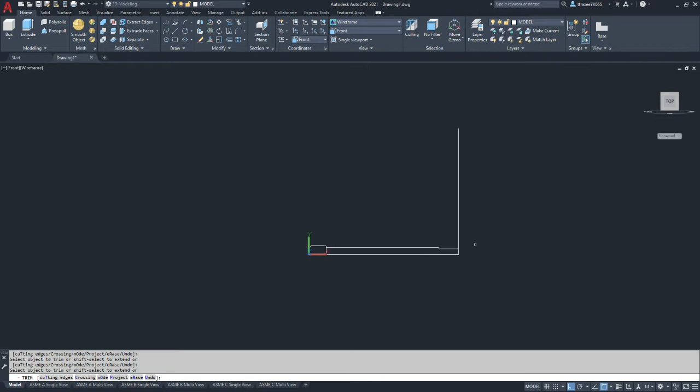Now we can trim off the excess. And we should be left with a shape that looks like that. And actually we need to trim off that little piece. And we can trim off this. Now we need to put our angle on here.

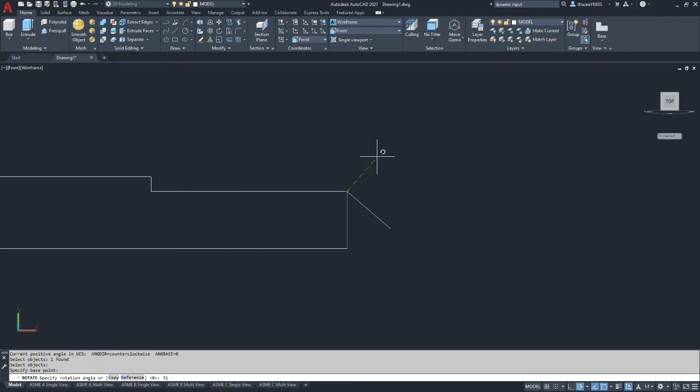Let's select rotate, select the object we're rotating, we're going to hit enter, we're going to select our pivot point, and we need to go the complement of 59 degrees. So that would be 31 degrees. Alright, so now if we draw an arbitrary line out in the end, we can do an extend and extend out our 2 points. And then likewise trim off the piece we don't need and delete the line.

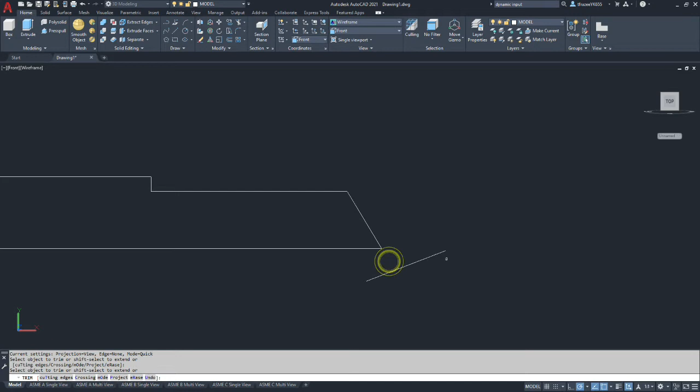Alright, we more or less have the shape we need to revolve, minus a little arc shape here. The drawing says that it's 185 thousandths from this corner. So let's draw a line, and we're going to offset that line 0.185 to the left. So that's one edge of our arc.

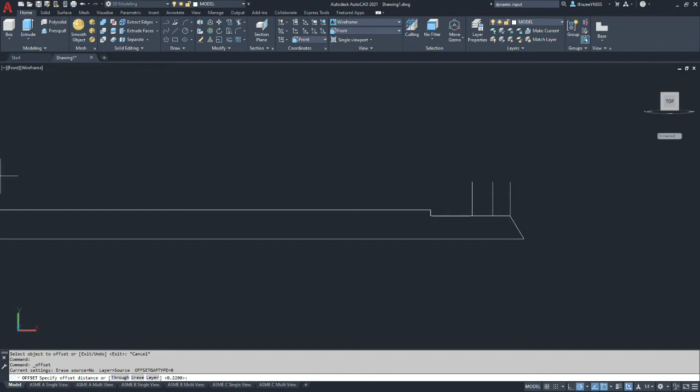And then it's 220 thousandths wide. So we'll repeat our offset and put in 0.22 and offset the line again. So the partial arc, non-tangent arc, fits between those two lines. And the third point of the arc, the bottom of it, is a diameter of 458 thousandths. So we offset half of that distance, which, half of 458 should be 229.

So 0.229, and we offset from center line. Alright, so now if we extend, we trim the length of that line, we have 3 points we can select on. We can pick on the intersection of these lines for the first point, the midpoint of this line for the second point, and this endpoint for the third point of an arc.

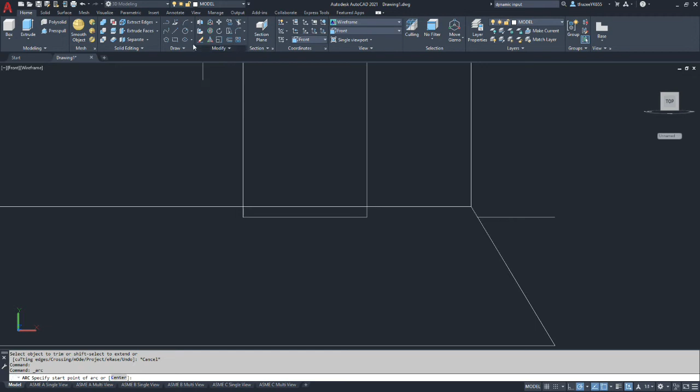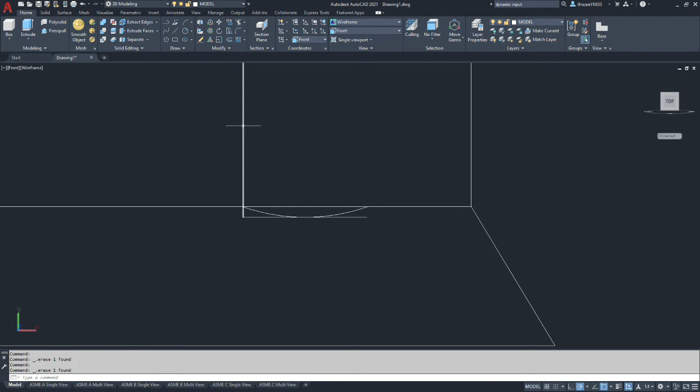So we're going to switch to arcs, and we're going to use 3 points. And make sure your object snaps include intersection and include midpoint. So we're going to go from intersection to midpoint to endpoint, and we get our shallow arc. We then can delete these other construction lines by just highlighting them and pressing the delete key on your keyboard.

And then we come back and trim off the line segment that falls in between. And we also don't need this construction line anymore. I'm not sure why I was having trouble trimming that box out, but alright, so we're at a point where we can revolve this. We need to join this all into one entity.

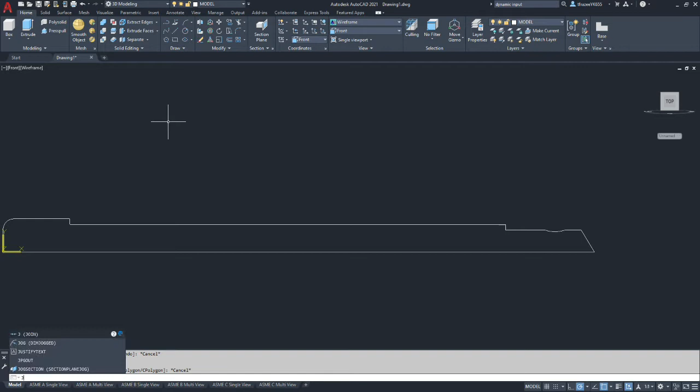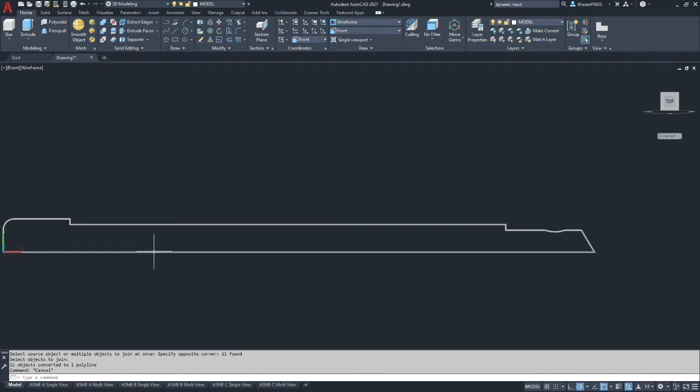Now you can use polyedit or you can use a join command. You may actually be able to use a region command too, but I'm going to use the join command and select everything. And when you go hover over or select it, it should be all one piece. I'm going to go to an isometric view.

We're going to select our solid revolve. So you're going to go to the extrude command, and you're going to pick the second option down, which is revolve. And we're going to revolve the joined body. We're going to hit enter to accept that. And you could use an object. The problem is it's all joined. So I'm going to use some coordinates.

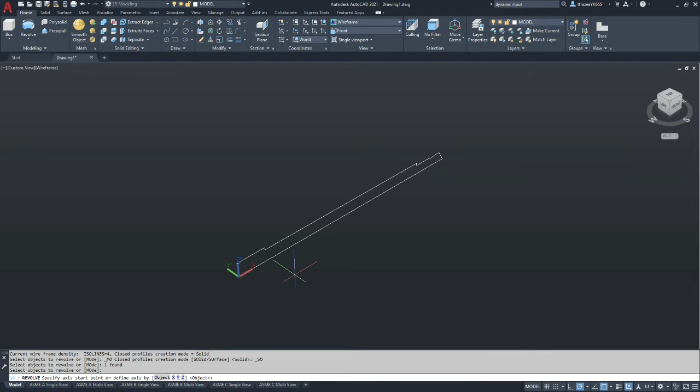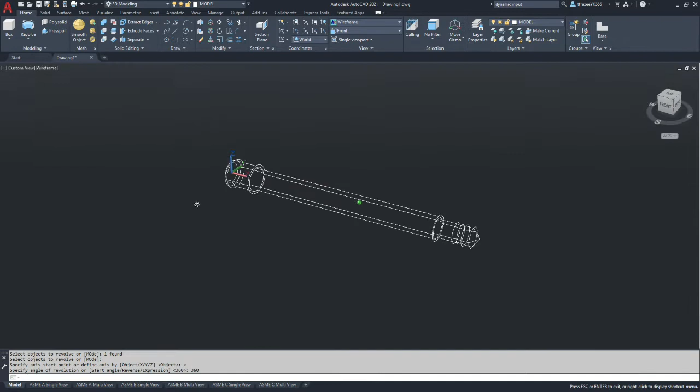X coordinate, and we're going to put 360 degrees in. So that rotated it in the coordinate direction of what I had in X. Now if your gnomon, your trihedron, is pointing a different angle, you would need to pick the one that's going in the correct axis. So we're going to go to the conceptual, and you should have something that looks like this.

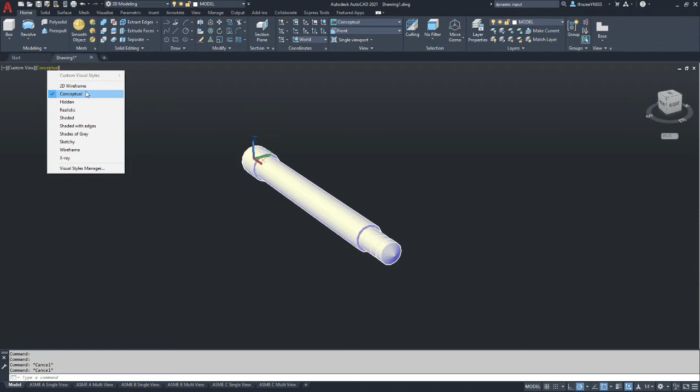Okay, and the first thing we're going to do is set up a couple sketches. So the first one, we're going to set up a sketch that's going to mimic the cross section of the thread we're going to cut, and we're going to use a helical path for that. So we're going to go back to wireframe. This way I can pick this top quadrant of the model and create a line that's horizontal. That horizontal line represents the major diameter of the thread.

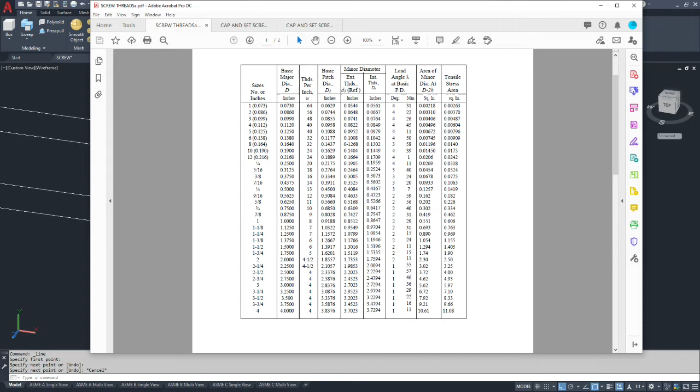If we go to our chart, the minor diameter of the thread for a 5/8-11 on an exterior thread is 0.5168. So if I were to take the major diameter of 0.625 and subtract the 0.5168, I'm left with a difference of 0.1082. If I divide that in half,

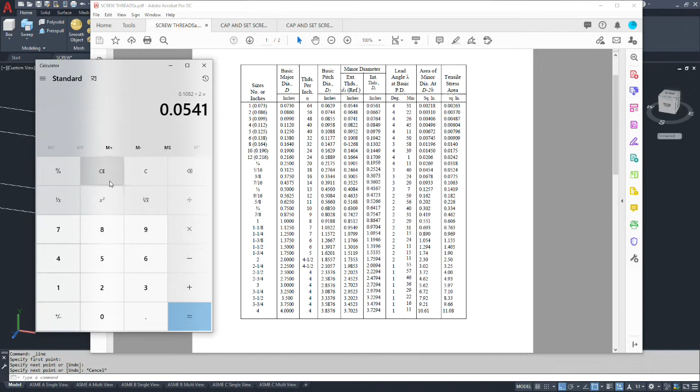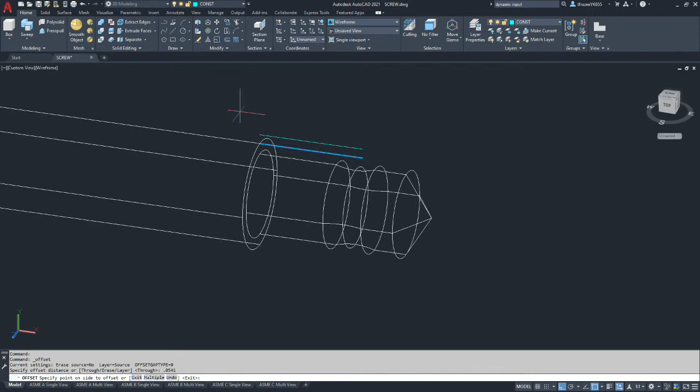that is the difference between the major and minor diameter, 0.0541. I am going to do an offset of that amount from the outside for the radial difference. Offset of 0.0541. Alright, so this is the major diameter, the minor diameter.

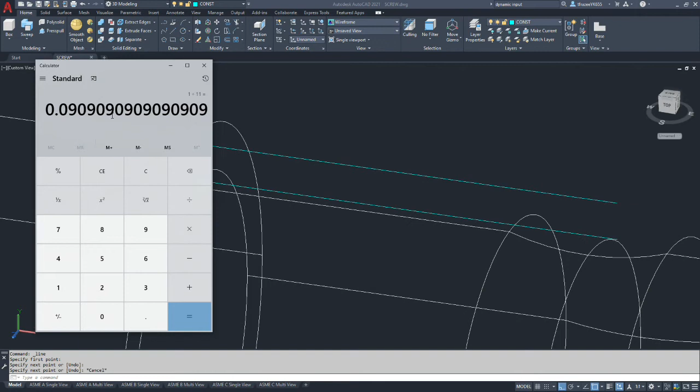I'm then going to draw a line from endpoint to endpoint, and I'm going to offset that by the pitch, which is 1 divided by 11. So it's 0.0909. I'm just going to use 0.09. So I'm going to offset 0.09 this vertical line to the right. So if I were to trim this up, this blue box represents one thread pitch.

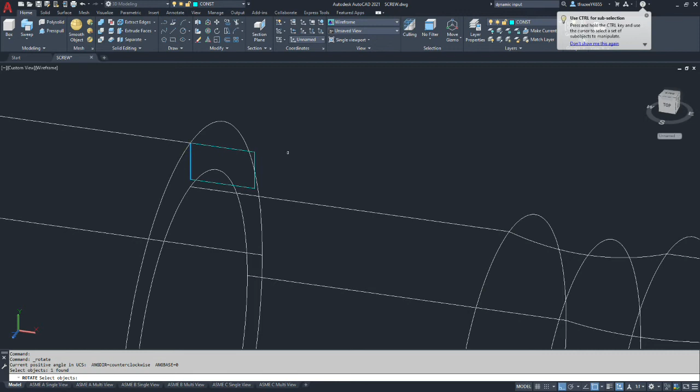Now remember, the thread pitch goes from the theoretical sharp to theoretical sharp, and the UNC thread has flats on it. So the next step I'm going to take is take the vertical line on the left, and I'm going to rotate it, hit enter.

I'm going to pick our pivot point, and we're going to go 30 degrees. Now we're going to repeat that procedure on the opposite side. Do a rotate, the line on the opposite side, hit enter. Our rotation point's the top, and we're going to go negative 30 this time.

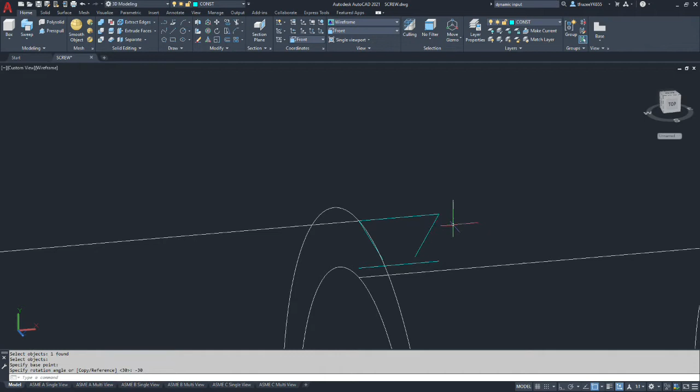Now we're going to go to the extend command, and we'll extend our angled pieces, and then we'll go to trim and trim off the tails. Now our spacing is off. The reason our spacing is off is, again, the pitch is between theoretical points that are above. So the thread pitch, the distance between this face and this face, is actually halfway between here.

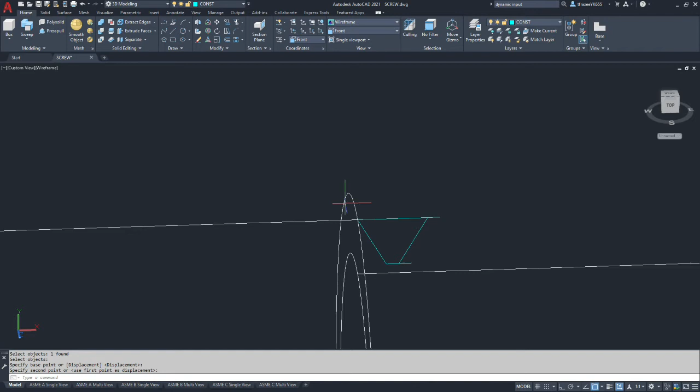So an easy way to fix that is we're going to do a move. We're going to select the right hand side face and accept that. We're going to go from endpoint to midpoint and move it over, split the difference. We'll then take the trim command and trim off our tails.

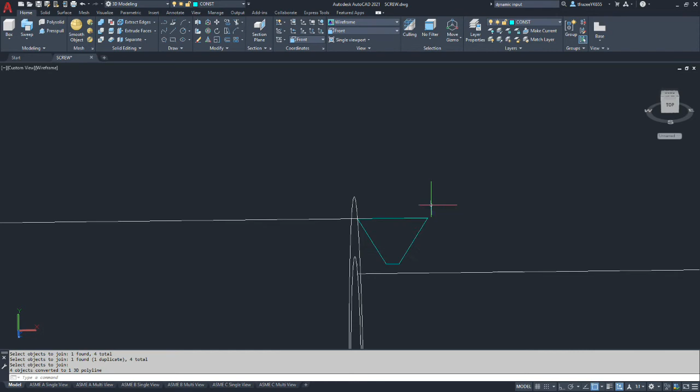At this point we have the profile we need. We need to type the join command, join, and select these cyan entities to make them one. Now we've done the piece we need for the cutting profile for the thread.

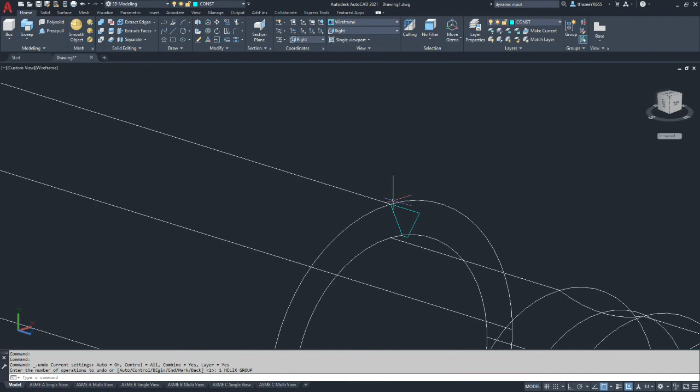Okay, now that we have the profile established, we need to make the helix. For this information, we need the thread pitch and the diameters as well. Now you can choose to make the helix either at the bottom of your thread profile or the top. I'm going to make it at the top. We're going to go to draw, select the helix command.

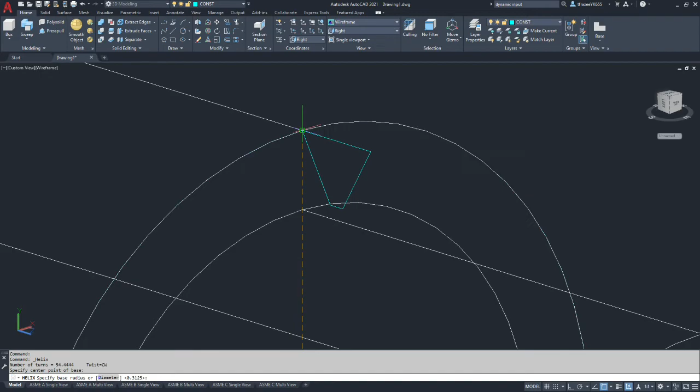It's going to ask you for the center point of the base, so that's your one end of the helix. So I'm going to pick the center of the model. Make sure you have your correct object snaps. Now it's asking you for, by default, the radius. I'm going to select the top left corner of our profile, and that's where our helix will start, because it's easier to attach it to the profile. You don't have to, but it puts it in the correct position.

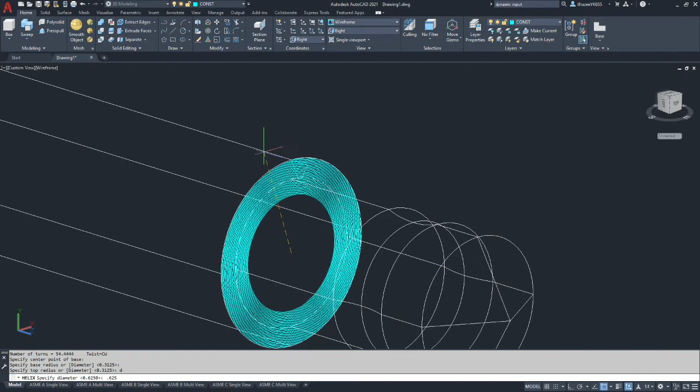Now it's asking you, what is the diameter at the opposite end of the helix? So the diameter is 0.625. So we're going to type D, we're going to put 0.625 and hit enter. Now it's asking you what's the spacing, and there's a bunch of different options. One unfortunate thing about the helix is it defaults to counterclockwise, because in mathematics, counterclockwise is a positive radian.

So first we need to set a bunch of parameters. We're going to set the twist. You can type twist, or it looks like the hotkey is W. We want to make sure that it says CW for clockwise for a right-handed thread. If you put counterclockwise, you're going to have a left-handed thread. So you're going to type in CW for clockwise. That sets the spiral direction.

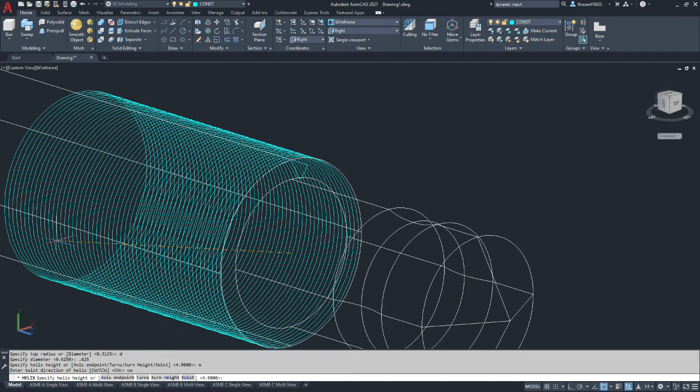Then it's asking you what's our spacing. There's axis endpoint, which is the other end of the spiral, which will just evenly space them between one and the other. You can tell it the number of turns or the turn height. The turn height is what we want, and the turn height is going to be your thread pitch, which is 0.0909 in reality, but we're not going to worry about that tolerance of the model. So that gives us the thread pitch that should give us 11 threads per inch.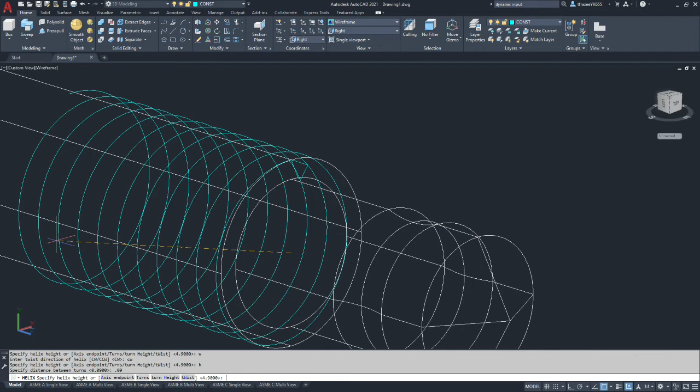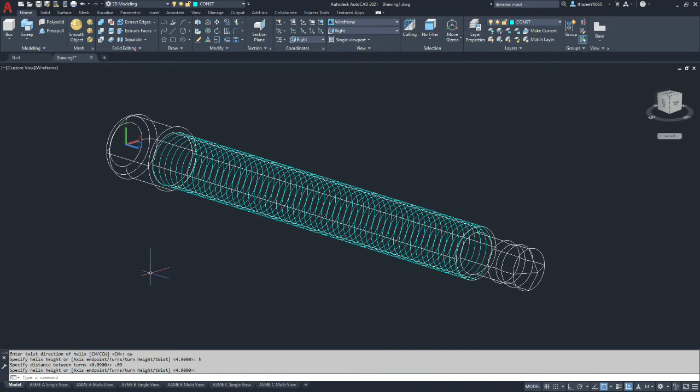Now the last parameter is the actual length of the thread. We're going to go all the way to the center of the opposite end of the shaft and select it. So that gives us a helix with an 11 threads per inch pitch, and then here's our profile that we're going to drive along that, and we'll create a solid body that will be subtracted from the main solid body.

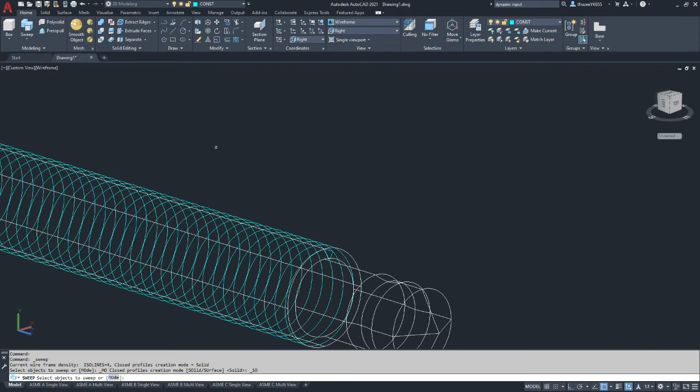Alright, so now we're going to go to the sweep command, and it's asking you what's the object to sweep, and that would be your profile. We select our blunt triangle, and we're going to accept the default mode, which should be solid. Now it's asking you for some information. There's alignment, base point, scale, and twist.

We do need to adjust the alignment. We're going to press A for alignment. Is our object perpendicular to the path before the sweep? We are going to say no. If we don't do this, it'll rotate our profile to be 90 degrees from what it currently is facing.

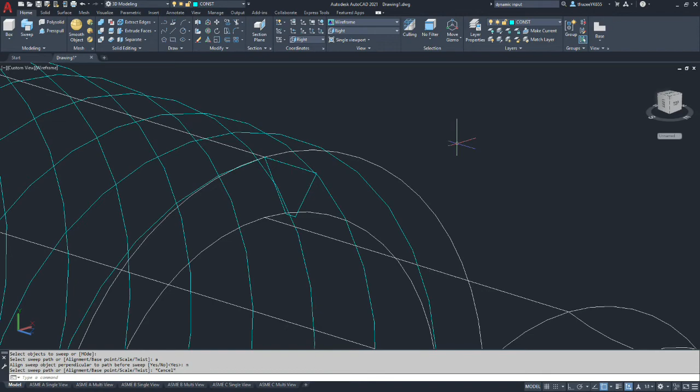Okay, and if you did draw your profile on the end of your spiral, you can just hit enter at this point. If you did not, you need to align the base points. So you select a base point on the profile, which would be this corner in this case. I should be able to take the default. Okay, back up to helix. Okay, so we've got the helix.

Now, we use the edge geometry to draw our profiles, but this front edge has a 20 thousandths lead in. So now that we are done with needing to select that corner, we should put an edge chamfer on this edge prior to doing the threading. So sequence-wise, I wanted it sharp to develop the triangular profile and the helix, but now that we don't need that corner, we're going to go to the solid command, we're going to go to chamfer edge, and we're going to select this outside edge.

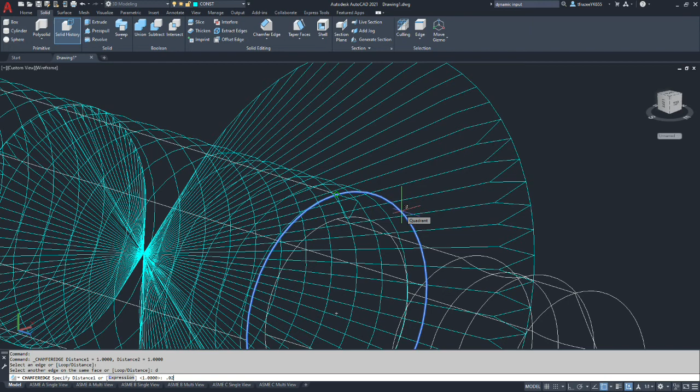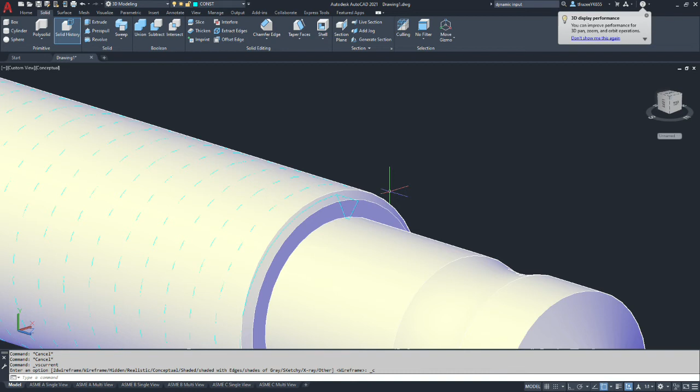And mine's defaulting to an inch chamfer, which is huge. So I'm going to hit distance, and I'm going to do a 0.02 by a 0.02. So that's a 45 degree 20 thousandths chamfer. And we're going to accept that, and we're going to hit enter. So we have currently, if I were to switch to conceptual, we should have a chamfer on this front edge. Okay, we're going to go back to 2D wireframe,

and now we're going to do our sweep. So you can do it in here. I'm going to go ahead and go home and pick on sweep here. It's under the extrude pull down. I'm going to select the profile that's going to be swept, hit enter to accept it. We're going to type alignment. It's going to ask, is it perpendicular to the sweep?

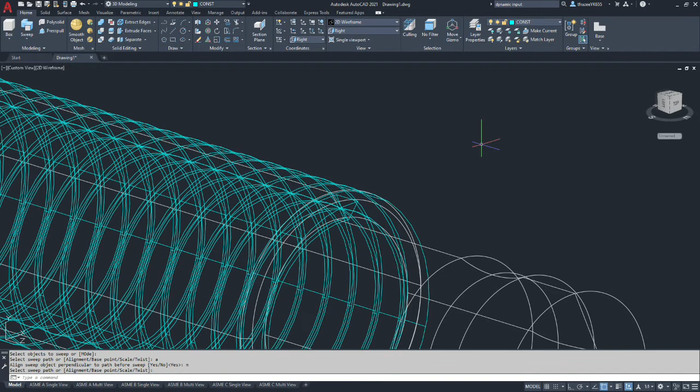No. So it's N. And then since I drew the helix, my path, in alignment with my profile base point, I'm fine with that. So I don't need to change the base point. I just need to select the path, and it should generate a solid helix. So my helix is in cyan. So we now have a coil body that we can use to cut the base body.

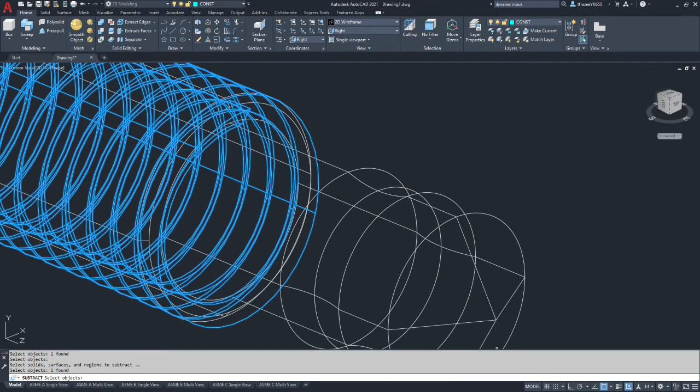Alright, so now it should be a matter of selecting subtract, and the solid that we're going to keep is the first thing you select, and we hit enter. And now we're going to select the solid we're removing material with. And I would kind of zoom in to where it's running off the part to the chamfer and select it and press the enter key. Now if you did everything correctly, you should end up with a helix that's been cut, thread into your model.

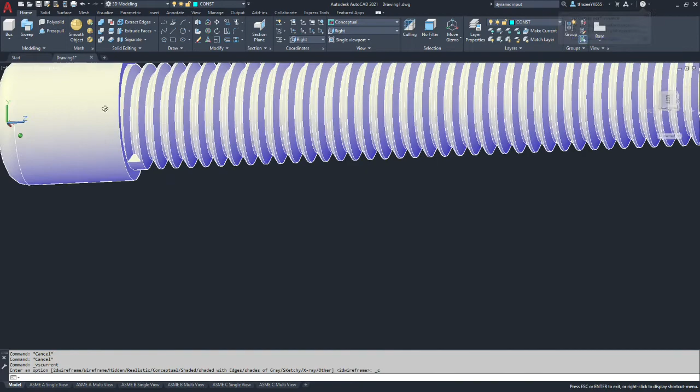So let's look at this in conceptual mode. There we go. We've got our thread. In reality, you would have some runoff there, but that's fine for graphical purposes. On the front, where did my model go? On the front, we have a chamfer leading into our thread. The only thing left is to put the hole in the head.

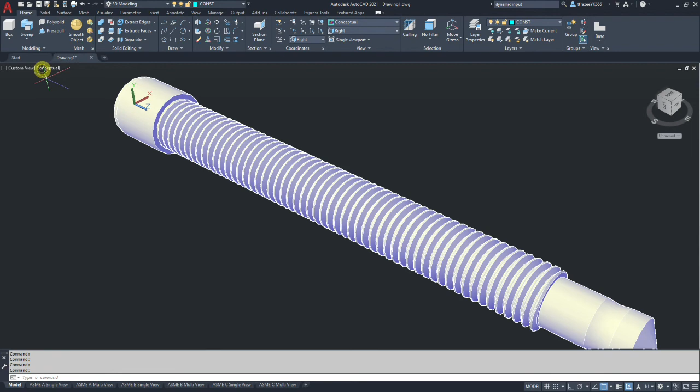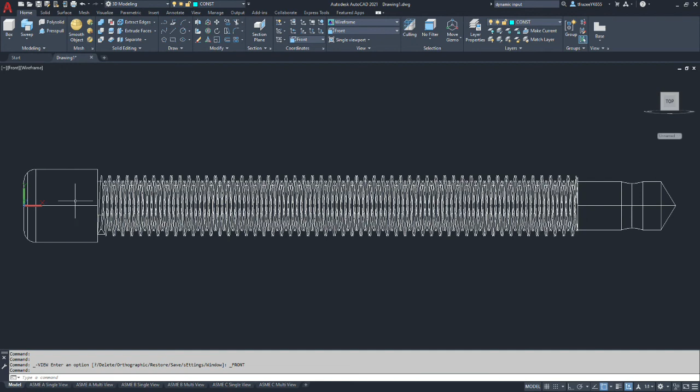Let's turn conceptual view back to wireframe. And as always, there's more than one way to approach this. I'm going to go to a front view. And I'm not sure why this keeps switching back to perspective. And we're going to draw our circle. Take our line with ortho from origin. Turn ortho on. Turn our object snaps off. And draw our line out to an arbitrary point. And we hit escape, and we're going to come back and draw another line from origin up.

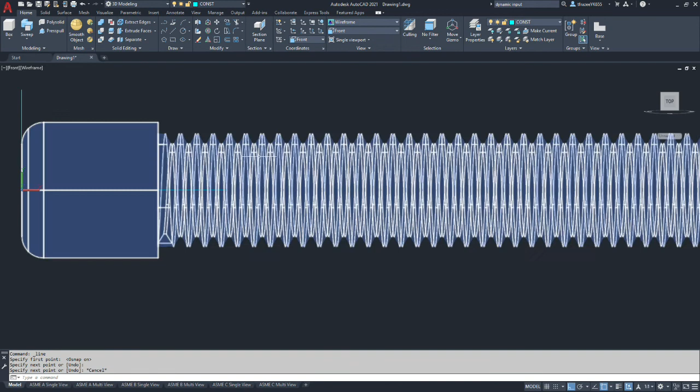We then can offset a line from the line that's vertical from origin, 0.31. I'm going to select it and go to the right. So the endpoint of this line is where the center of our circle will go. And the circle is a 0.281. Actually, we're going to change to diameter by pressing D. And the diameter is 0.281. So we've got a circle where it needs to go. We can go through and delete this construction geometry because I don't need it anymore.

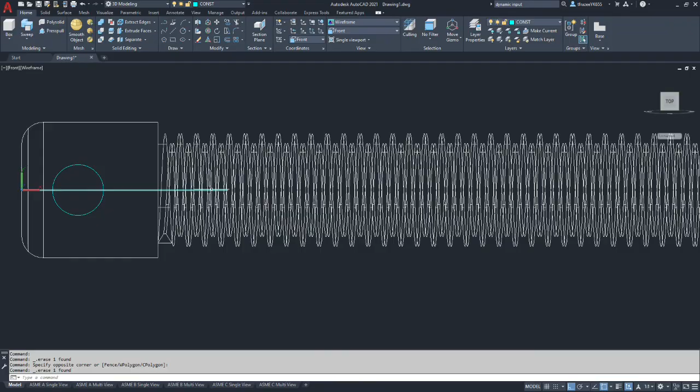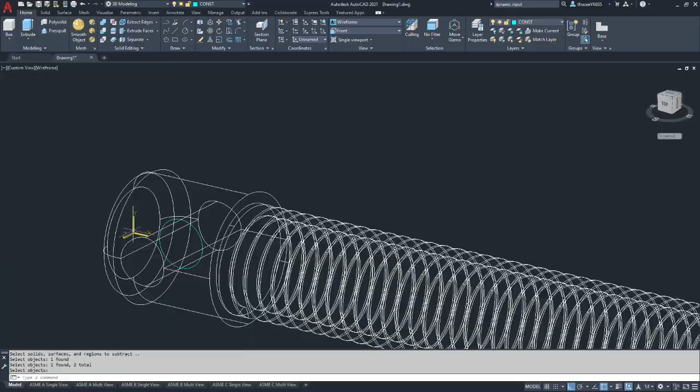I'm going to look at it in a 3D view. Okay, with our circle, we're going to do a press pull. And we're going to pick on our circle and drag it out some arbitrary amount. And then we'll press pull the opposite side, some arbitrary amount. Now that'll allow us to do the subtract body. So we're going to select the body we're subtracting from, hit enter, and then select our two pieces that will be removed. And we're left with the hole in the middle. Alright, that completes this model for the main screw for the vise project.